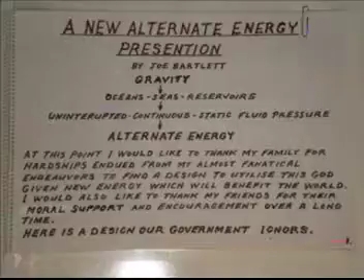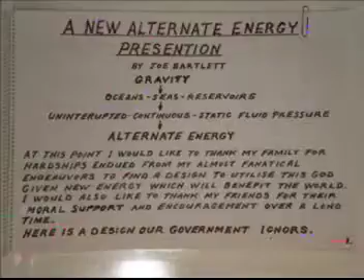Here we have gravity acting on oceans, inland seas and reservoirs. This gravity creates hydrostatic water pressure. For example, if we come down 231 feet in ocean depth, this will give us 100 pounds per square inch water pressure. Now if we went down and continued to 462 feet, that would give us 200 pounds per square inch water pressure.

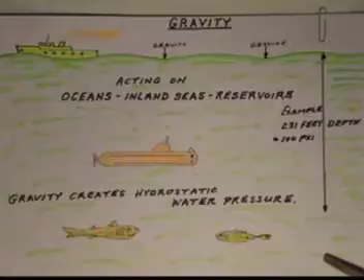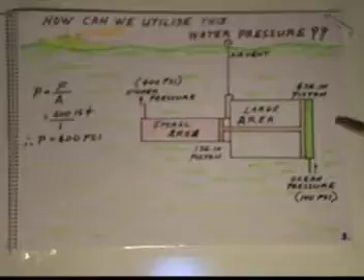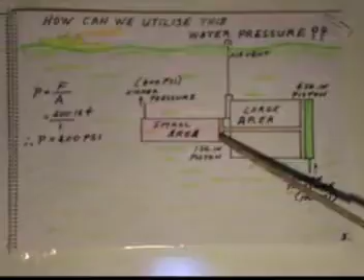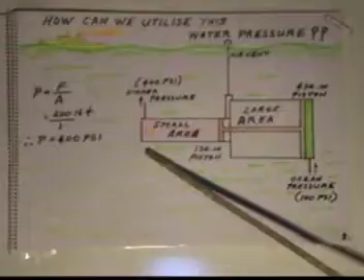Now how can we utilise this water pressure? If we place two single acting hydraulic cylinders under the ocean at 231 feet depth, it will give us 100 pounds per square inch, which then acts against the 4 square inch piston area, forcing the smaller 1 square inch piston across, thus giving us 400 psi higher pressure. So we have produced 400 pounds per square inch from a 100 pound per square inch supply pressure.

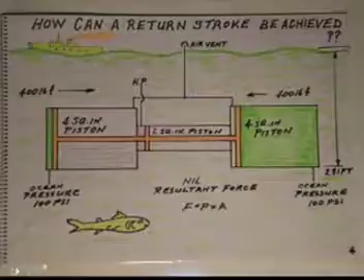How can a return stroke be achieved so that we can achieve a recycling action to give us a continual 400 pound per square inch pressure? Do we add another hydraulic single acting cylinder of the same size in line on the other side? Then we will not get a return action because both areas are the same and therefore we have equal forces and there's zero action. We can go to a larger cylinder.

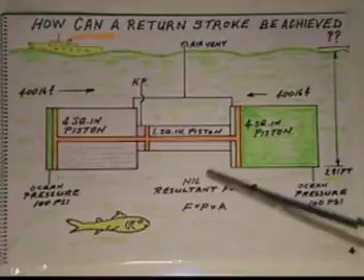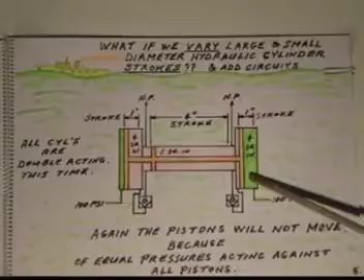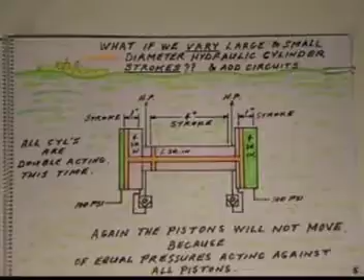If we go to a larger cylinder, it will return. However, then we still have the same problem when we wish to recycle back. What if we vary large and small diameter hydraulic cylinder strokes and we add two small circuits? Only this time all our cylinders are double fluid acting against each surface of the large and small pistons. Again, the pistons will not move because of equal pressures acting against both surfaces of the large and small pistons.

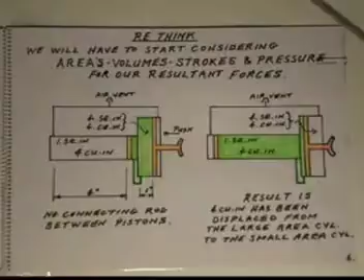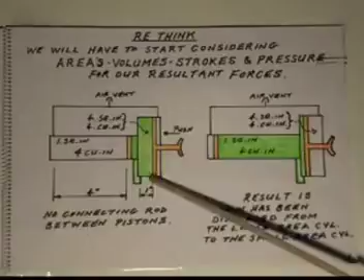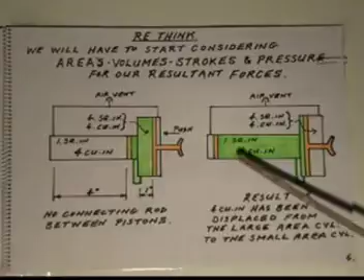We shall have to rethink and start considering areas, volumes, strokes and pressures to achieve our resultant forces. Now if we have two syringes connected and we push on the larger syringe, which is 4 square inches with a 1 inch stroke, fluid will travel through into the 1 square inch syringe coming over this side and fill up the 1 square inch cylinder, and we find that our stroke results in a 4 inch stroke. So the fluid has been displaced from the larger area into the smaller area.

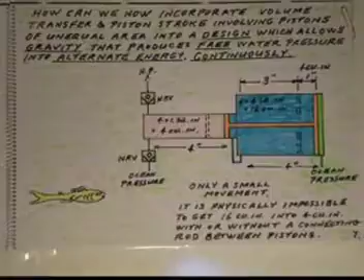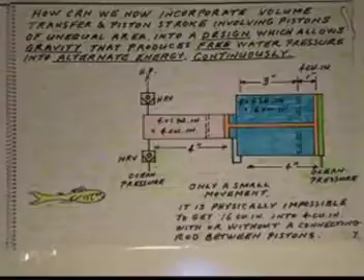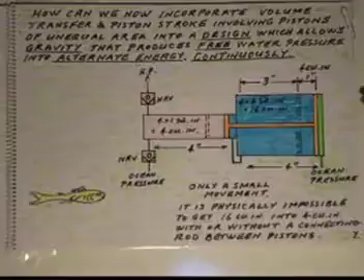How can we now incorporate volume transfer and piston stroke involving pistons of unequal area and the same stroke into a design which will give us a force resulting from gravity? If we have the ocean pressure coming in acting against a larger cylinder, it will only move a very small distance, as it is physically impossible to get 16 cubic inches into a 4 cubic inch cylinder, with or without a connecting rod between the pistons.

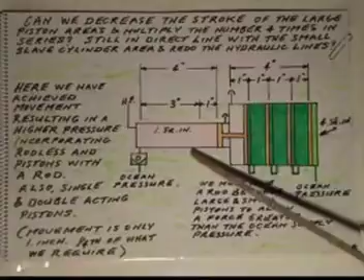Now, can we decrease the stroke of the large piston areas and multiply the number 4 times in series, still in direct line with the small slave cylinder area, to get our hydraulic force? The first 3 cylinders, 1, 2, 3, shall be rodless, double acting, and the last one we end up having a single acting cylinder with a rod direct acting onto the small slave cylinder.

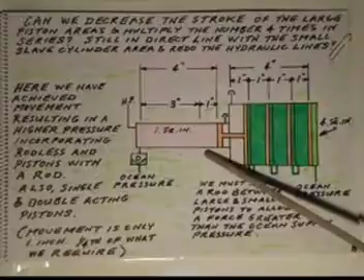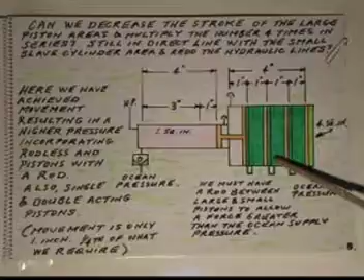With our ocean pressure acting against the large piston area, we'll force that piston through, displacing the fluid on the other side into the next cylinder, which in turn forces that piston across, displaces this fluid pressure around into the next cylinder, acts against the next large piston area, which then displaces the following fluid through against the piston area here, which forces the rod and the small piston area outwards.

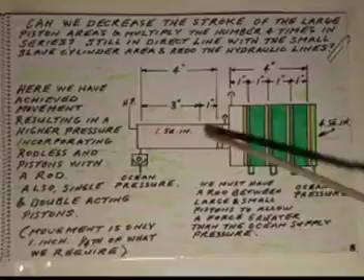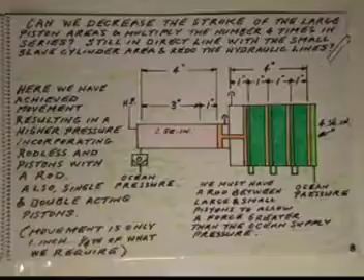However, this will only displace a 1 inch stroke of fluid out into our high pressure side, because each of the large cylinders has a 1 inch stroke each. Here we have achieved movement, resulting in higher pressure incorporating rodless pistons and pistons with a rod, also single and double acting pistons.

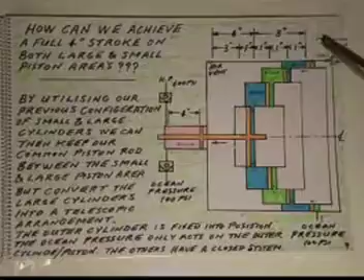How can we achieve a full 4 inch stroke on both large and small piston areas? If we turn to the large piston areas and incorporate a telescopic cylinder arrangement instead of the 4 large piston areas in line, we should be able to achieve this.

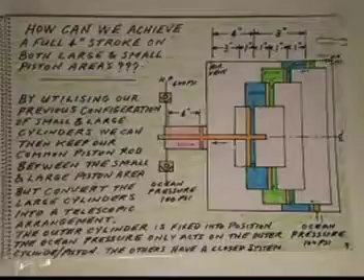We shall have the outer telescopic cylinder fixed into position with 1, 2, 3, 4 piston areas incorporated into a piston cylinder arrangement. With our ocean system pressure acting against the outer piston, this will force fluid on the other side to act against the next inner piston.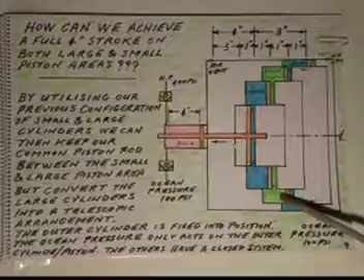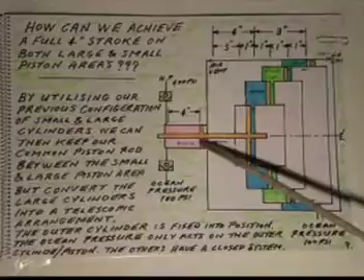Once again, fluid travels against and acts against the next piston, which in turn forces against our rodless piston, resulting in an action which forces against our small cylinder area, the slave cylinder, forcing the piston outwards, giving us 400 psi.

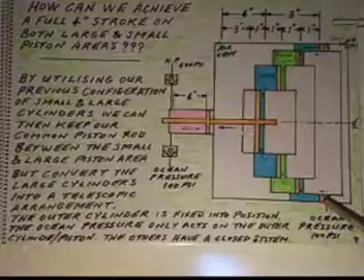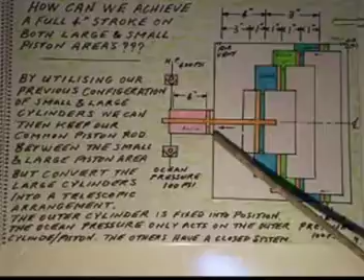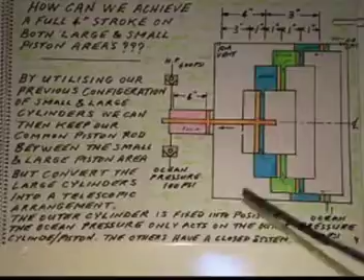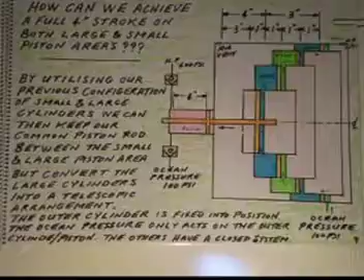Now with our ocean pressure coming in and acting against the outer cylinder piston, instantaneously it forces fluid pressure through, acting against all 3 pistons, which gives us a complete 6 inch stroke coming out on our small piston area here. Because we have vented the front of this piston, we have a pressure differential of 100 psi equivalent to atmospheric pressure, thus allowing us to achieve a force outwards.

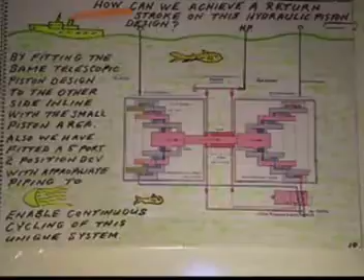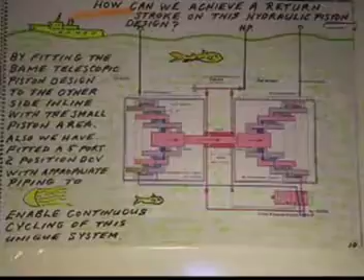Now, how can we achieve a return stroke on this unique telescopic hydraulic piston design? We can do this by fitting the same telescopic piston design across to the other side, in line with the small piston area. We have also fitted a 5-port 2-position directional control valve with appropriate piping to enable continuous cycling of this unique system.

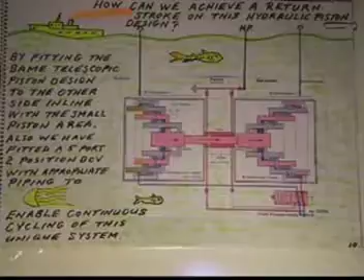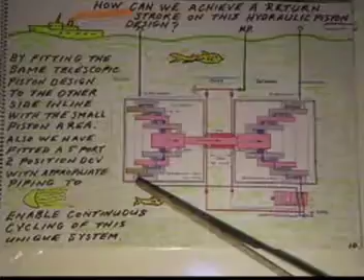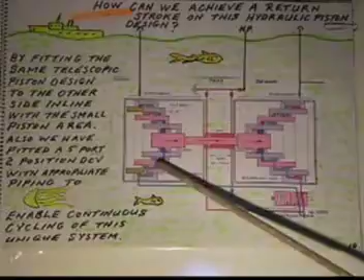The directional control valve allows ocean pressure supply in and through to the outer piston of the left hand side assembly here, which instantaneously forces the outer piston through the rest and to the inner piston, which then acts against our smaller area slave piston cylinder, forcing fluid out at a higher pressure.

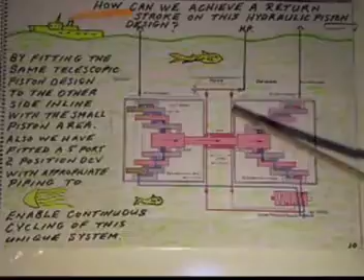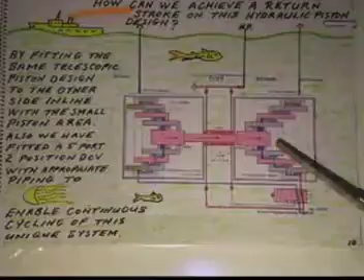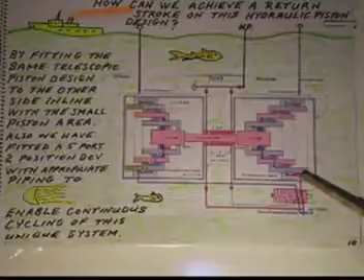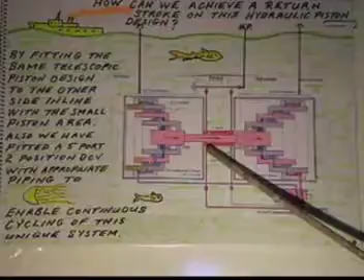We find that as the left-hand side hydraulic telescopic cylinder piston assembly extends outwards, the right-hand side hydraulic telescopic piston assembly will retract. When this telescopic cylinder assembly retracts, we must displace fluid behind piston number 4, which then travels back through the directional control valve to the rear side behind the smaller slave cylinder piston.

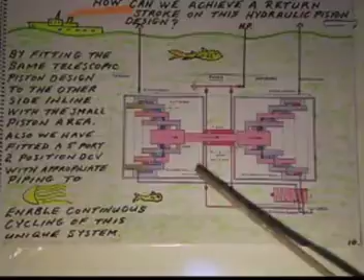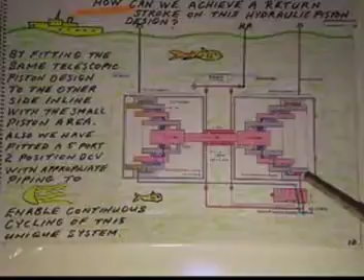It's possible to displace the fluid behind piston number 4 around to the other side behind the slave cylinder piston, because as we saw before, with a shorter stroke of example 1 inch here with a 4 cubic inch volume, we could fill up a 1 square inch by 4 inch long cylinder equally.

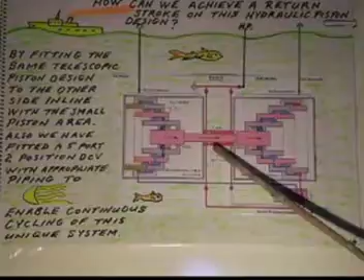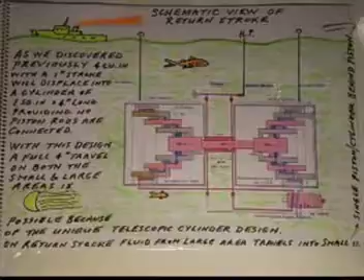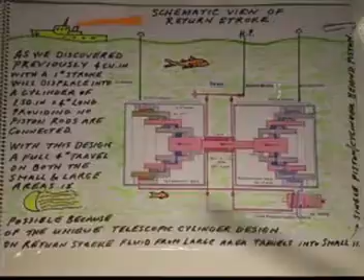With our directional control valve, at the end of each stroke it would be either mechanically or electrically actuated to allow us continual recycling of this whole design. Now, if we want to stop or start the design on the pressure inside or the high pressure outside of the system, we can fit ball valves or stop valves in the system to enable stopping and starting.

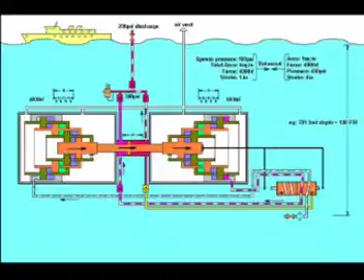Now we have achieved another means of harnessing an extremely efficient, continuous, alternate energy made possible by gravity acting on our oceans, inland seas and reservoirs, causing hydrostatic fluid pressure. This presentation has shown a simple, basic way to supply energy previously not shown anywhere.